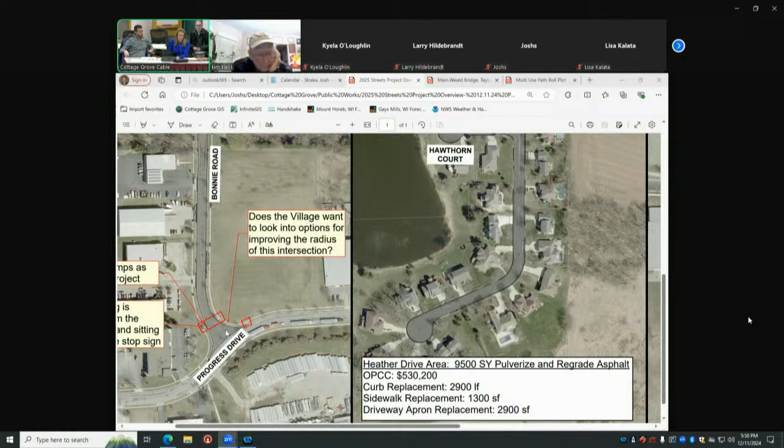Yeah, that location, with the police station there, you may have some other things you're going to be doing at that site. When we look at this intersection, it has really big radiuses, bigger than even the turning radiuses on Main Street to get onto Progress Drive. There probably isn't a need for that. It almost looks like it was planned so that trucks could turn, multiple trucks turning at once, which is a little atypical. Unless you're going to have extreme truck traffic, you just allow them to wait, hold up, and then take all lanes to make their movements.

Doing that pushes that crosswalk way back, right? And legally, the crosswalk's supposed to be in front of the stop sign. So it's just set up really strange. As we were looking at this and talking to Kyela, it almost feels like maybe we should stop short and you guys should consider this intersection a little more as the police department comes in and does their site design, or we could do something now if so decided. But we'd like to get your guys' opinion on that moving forward.

Well, my opinion is that, given there's going to be more development in this area and it's less of an industrial park with semi-truck movements like when it was originally designed in the early 90s, not knowing what facilities were going to be here, we could certainly put a road diet on this intersection and pull both those radiuses in. Now would be the time to do it as part of this project, since that's the exact same work going on. I think we have enough time to go through that exercise to do it correctly before the project goes out to bid.

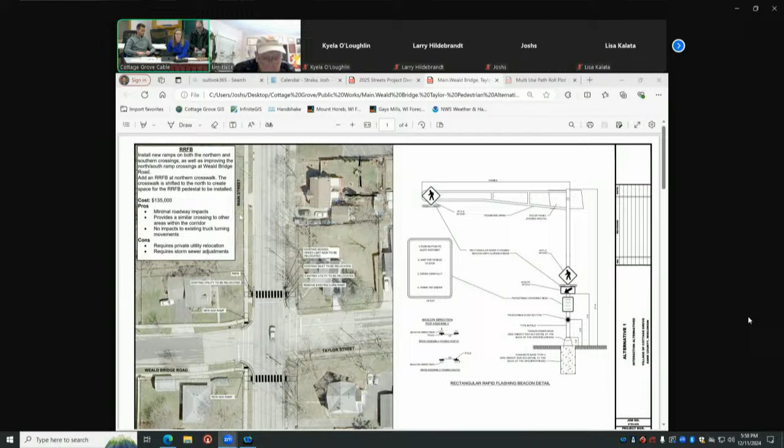The pros of this are minimal roadway impacts and it provides a similar crossing to a lot of other crossings in the corridor. When this crossing gets shifted to the north, there are some minor utility impacts. Along with this project, the other crossings here are upgraded or updated to current ADA, and then another crossing is included on the south side.

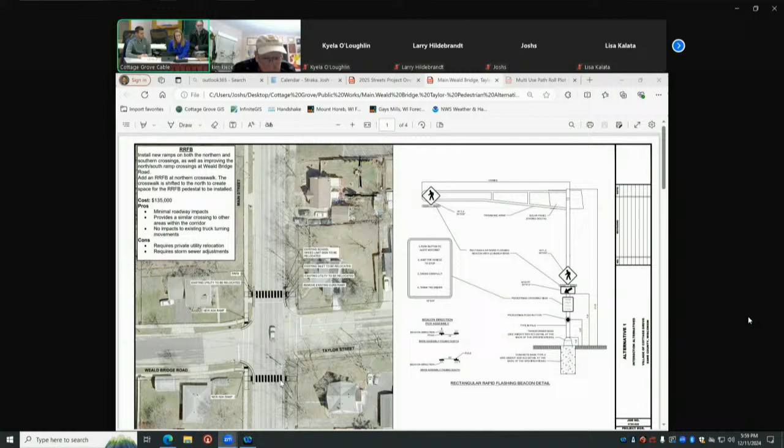Some of the cons are it requires some private utility relocates and storm sewer adjustments. Technically, with the mountable median, it does not provide pedestrian refuge here. And then when the lanes are narrowed, the tapers would remove some of the parking along Main Street, which was discussed as an important part of this.

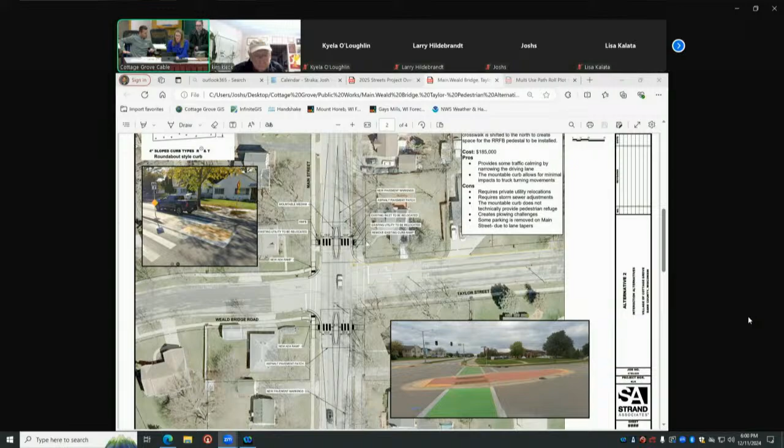Alternative 3 would be a raised crosswalk. Similar to the previous alternatives, an RRFB would go in, shifted a little bit to the north to provide space for that. The raised crosswalk wouldn't really impact turning movements, and along with the other alternatives, the other crossings would be improved and another crossing would be added to the south.

You can see a picture here from Monona that would be something similar, where it would provide kind of a speed hump that would calm traffic and slow people down as well. Now this could create some plowing challenges, similar to the median as well.

The last option would be to provide bump outs. These bump outs would shorten the crossing for pedestrians. They wouldn't have to be shifted anywhere because this would create space for the RRFB. This would impact turning movements drastically in this area, which was discussed as an issue.

So we would just be looking for any direction on which alternative you think we want to pursue. Do you want to go? There's first. I'll add something because there's been conversation about it here tonight too from the public. This is kind of, there's like two things going on at once, right?

We're looking at this intersection for kind of pedestrian and bike movements. But then there's also this side issue of Lakewood going on about what additional traffic is going to be generated that comes to this intersection. We recently met with Lakewood. We know they have a traffic engineer on hand. They're doing counts out here, peak hour counts both in the morning and afternoon, and then they'll project what's coming out of their development to this intersection in a traffic impact analysis.

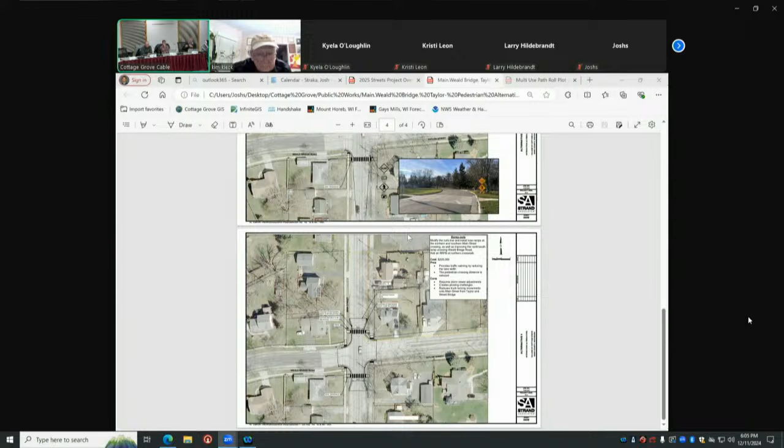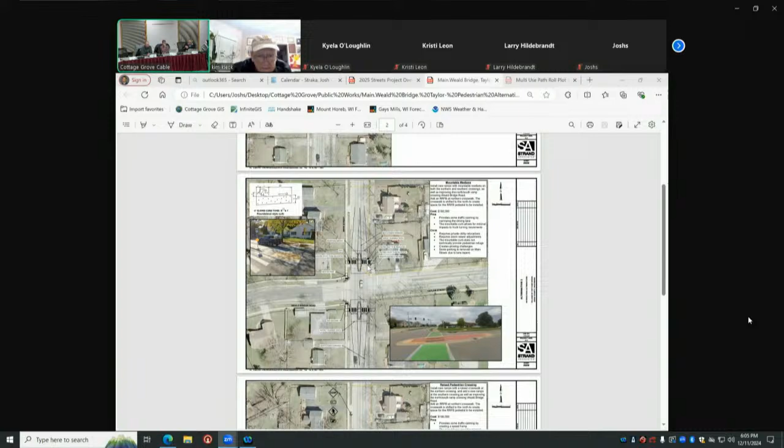The one alternative, I think it's number two, or even two or three, with the—I'll call it a speed bump, but the island, the hump, whatever you want to call it—my only concern would be, you have such large traffic going through there, big trucks. Does that create a lot of noise? Is there a lot of boom, boom, boom? Because wouldn't want the people living next to it to have to listen to that all the time.

Yes, it can. As part of the project, when I was discussing with Strand, it was what are the 4 best options we could bring to you guys, knowing the different constraints. That's why they put together that pro-con list with all the options, because it ultimately depends on whether we're looking to improve the intersection, which would be option 1, without creating smaller turn lanes, truck turning movements, or adding a mountable curb.

One thing I think would be important to note is I don't think there would be too much added noise, as long as you're going the appropriate speed.

But I think the most prudent option is probably to start with option 1, see where we're at going forward. If we need to slow people down continually, we can look at a speed hump. But based on what people have said about the large vehicles, I think having a median is probably not the greatest idea, and bringing in those curbs maybe not such a good idea either.

One question I did have is this looks like zebra stripes in the rendering. Most of the crosswalks in the village are just the transverse lines. Do we have a village guideline for what kind of paint we use when doing crosswalks?

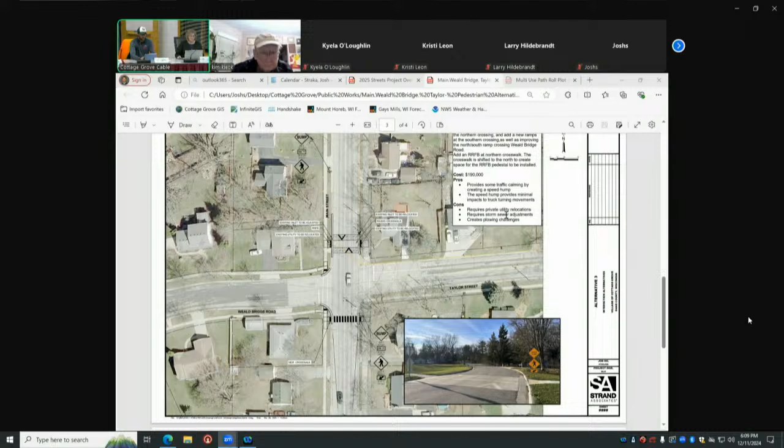All right, we will move to 5F, discuss the multi-use path. Sure, yeah, so the last project is the one along Cottage Grove Road.

Let me zoom out here for a second. Kristi, I'll let you take over a little bit on some of the discussion on this.

So it's creating that widened path to finish off the path that runs along Cottage Grove Road from Southern Grange over to Main Street. Starting at the west side, we just connect in, and we've chosen this kind of meandering path to follow the current multi-use path cross-section requirements.

Unfortunately, there are trees that are removed. We tried to move things around and save what we could while also meeting that cross-section requirement. There's some areas where we would tie into existing concrete. We come forward towards the road here because of this ditch area, and go through all of these driveways over here.

Can't see the side. The main portion to discuss here would be this wall requirement. There's many trees over here and an existing wall, and we've pushed the path as close to the road as we could and tried to do our best to save these trees in this area.

The path would get widened here, to not have a 2-foot strip of grass to maintain in this area. I'll zoom in on a cross-section in a second. That's where all those oak trees are, if you remember. We've talked about it in the past, right?

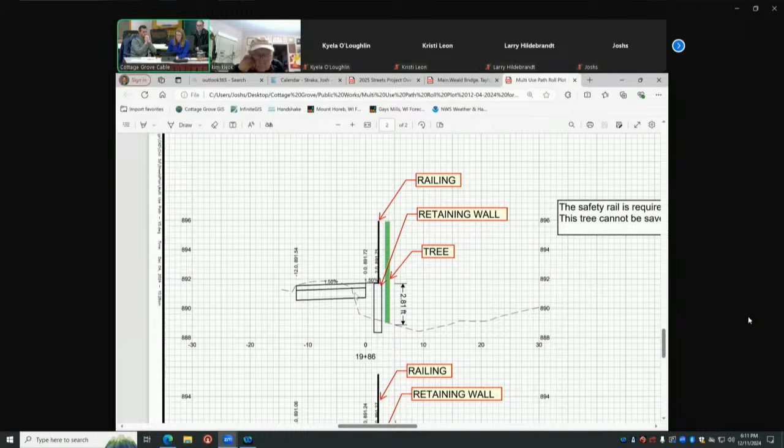So the way this would look at this point would be about a 3-foot wall here, and where the tree is surveyed would be right up next to that wall. So it just doesn't seem likely that it would get saved. And due to the wall and the distance off the path, there would be a railing requirement for that retaining wall.

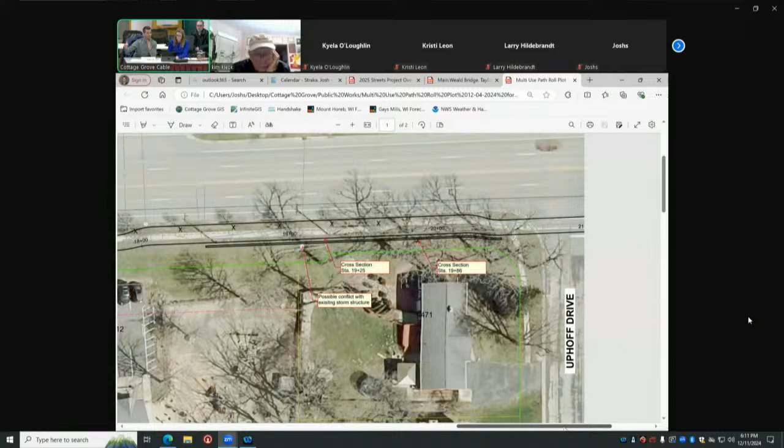Right, so we're showing that right along the curb, the path at the curb at that point. It goes back, but you're providing 2 feet of clear, so you're not riding right up against the fence either, to provide a little bit of clear space there as well.

So we're trying to hit some of the standards as part of that and try not to over narrow it. We could do a variance there and over narrow it, but then I feel like people are going to be upset that it might be a little too narrow in that section. It's up to you guys - it's either one tree or narrowing it completely there.

How wide do we have back of curb to back of wall right now as it's shown? It's a 12-foot path and then 2 feet to the front of wall, so 14 feet - 14 feet from back of curb to the street side of the wall. Typically you provide 2 feet of clear on either side.

So, Mike, think of that - that would be a 10-foot path. You could get a 10-foot path with 2 feet of grass on the terrace and 2 feet of grass against the wall. Yeah, but we'd probably just pave up against the curb, so you're not trying to pave that 2 feet of grass there. But even at a 10-foot wide path, which is 6 feet wider than the sidewalk that's there...

We could go to a 4-foot terrace, which would be very comfortable to maintain and look good, and keep people away from that lane of traffic on Cottage Grove Road, and still have 10 feet wide of pavement that a bicycle, walkers, runners, etc. could easily stay a foot off that railing comfortably and have plenty of passing room. My opinion would be to stay with 10 feet of pavement and 4 feet of terrace to keep people closer, further away from traffic, closer to the railing.

I mean, it's a railing. It's not like we're going 10 miles an hour on a bike through there. I think that's safe and comfortable and still provides a better look.

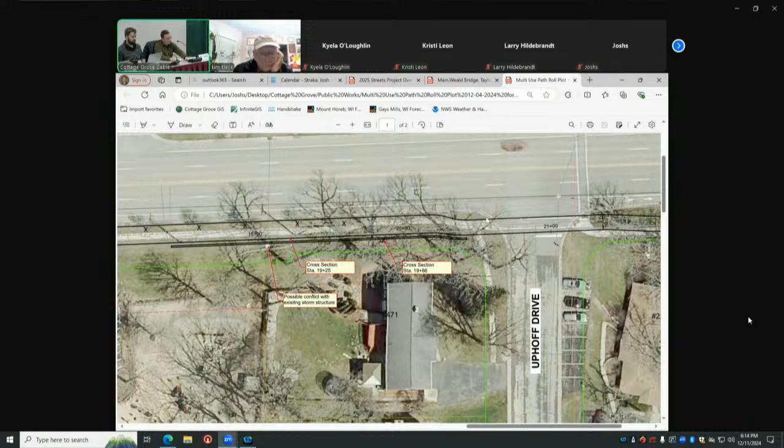The traffic is just too fast right there. Yeah, it pulls them away from it. Even the sidewalk is too close right now. And it would probably put it close to where the sidewalk is now, but you'd have a wider path that you could stay further away, which is kind of what you're going for.

There's an overhead distribution line along the south side of the sidewalk today. Does this accommodate that, or does that have to get relocated? I'm working with Alliant as part of the project, and it will be buried underground.

So that's the other thing to consider, this path is taking out trees along there. A lot of the trees now planted along there are the lower growing variety because they don't want them growing into the lines. So it might not be bad that there's some replanting opportunity here to create a corridor with some higher trees even on that side. While we don't want to take out trees, it might give you a chance to plant some stuff back that makes the corridor feel a bit more like an older corridor with higher trees on either side too. Just maybe a positive.

Are you going to describe further down the line, or should I hold my questions about further down the line? Sorry, Kristi, we kind of jumped in there.

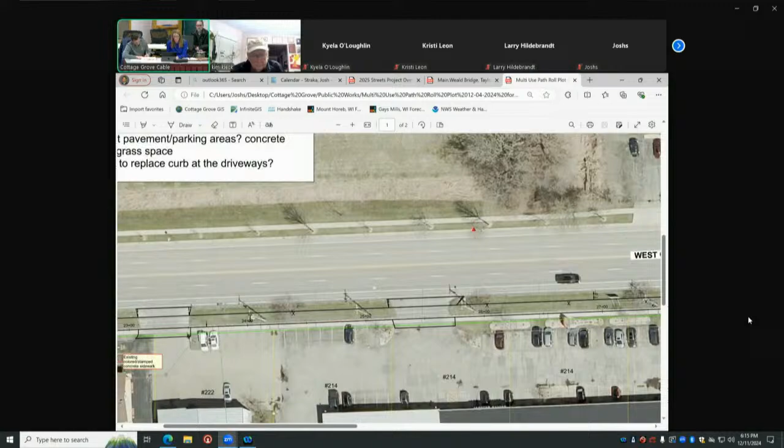So the rest of the next portion here, continuing to the east, is a lot simpler, less in the way. There are some trees, we go through the driveways, and we move closer to the road here due to some right-of-way changes.

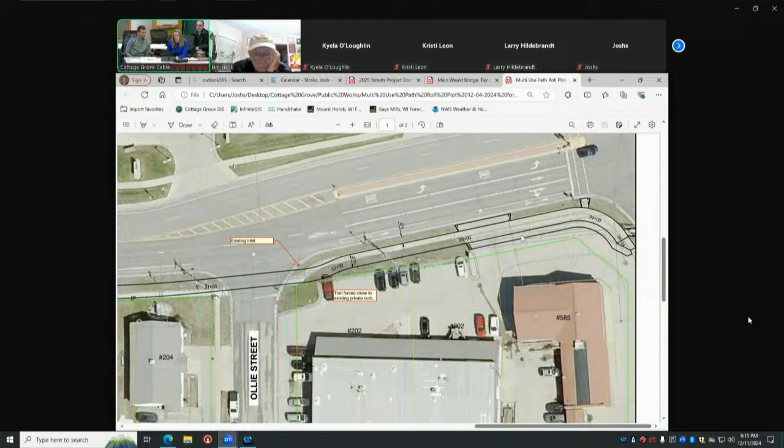We cross the street, and this area over by Ollie Street is one of our questions. Right now we have an asphalt path proposed. We're not sure if you'd like concrete through the driveways, or in this area possibly put concrete in to delineate it more where the asphalt goes right up against the sidewalk.

And then we have some questions. Do you want concrete through the driveways? Do you want to replace trees as part of the project? Are you okay with some of the grading limits going beyond the right-of-way to tie into some of these driveways better? And would you want to replace any of the curb at the driveways, or would we want to try to keep that within the limits of the existing curb? Or what were your questions?

Well, I'll speak to a little bit of that. I'm kind of split on the bike path going through the driveways. I feel that heavier truck traffic can do more damage to the asphalt through those driveways and shorten its life. I'd prefer to see concrete. I know you've got a lip or a bump each time you cross a driveway with the bike path at that location.

So I'll defer to your expertise as to which one makes the most sense. My preference would be the concrete, I guess.

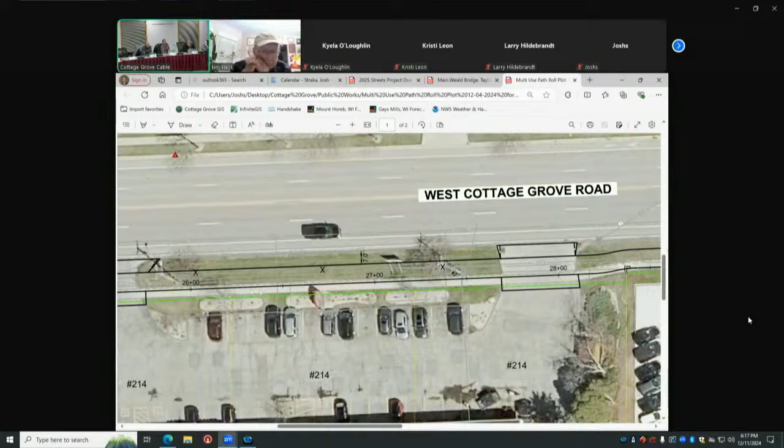Next question is, in front of Meineke and the shopping center there, right now the biggest problem is cars parking right up onto or over the sidewalk when you're trying to run or walk through there in the evenings. What do we have for separation to keep that from happening when this becomes an asphalt path tight to the parking lot? Is there a landscape separation there, or is it asphalt to asphalt a little further west of that location?

That's fine in front of the shopping center, it's right down there closer to Meineke and the west side. Yeah, that area right there. So we do have space proposed, 4 feet from the edge of the concrete to the asphalt the way it is. Okay, that would be very helpful, because that's the biggest problem right now, a 4-foot sidewalk with a car generally overhanging at least a foot, if not 2, onto the sidewalk. Makes it very difficult to get through there a lot of the time.

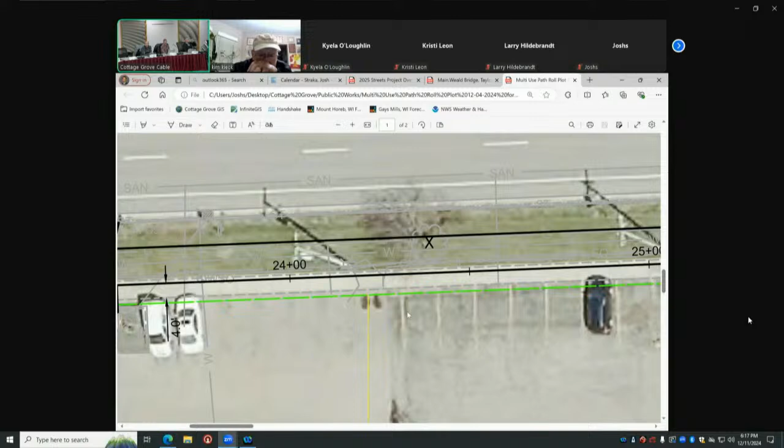In the winter, they plow all the snow right there, and it often goes right under the sidewalk. Yeah, I mean it requires a few more trees to come out again along that piece, but it gives you that separation like you were talking about, Mike. That's why we proposed it set away a little bit from that parking.

Yeah, last comment regarding the trees. Knowing that the overhead line is going away, I absolutely would like to see a line item for replacing new terrace trees throughout this area. Once again, that's another thing we can consider to accept or not accept come bid time or budget time. But I do believe we should be trying to plant trees back in there as part of this.

So I want to make a comment that I have general concerns about safety of the bikers on this path, all the driveways, especially Meineke and Black Bear. I would like to have some discussion of what we can do to help mitigate this. I think the idea of concrete over these driveways, I would not be in favor of. Part of it is this perception of right-of-way, and I want these bikers to have the right-of-way and know that the vehicles need to watch for them and wait for them. I know there's construction reasons why you wouldn't choose that, but in general, these are very uncontrolled intersections that are of high traffic, and bikers are going much faster than walkers. There is a much higher chance of some problems occurring. I don't know the best solution. I don't know if it's coloring them a different color, if it's signs, or if it's considering the north side. And I know the north side has its own problems with ACE, and then the cross section or the intersection with Oak and everything. But I'm concerned, and I don't know the best solution forward.

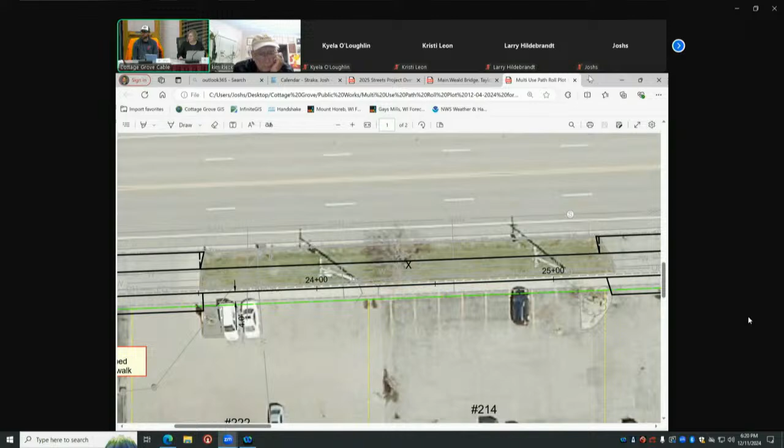Has anybody seen the new stuff they did in Fitchburg along Fish Hatch? It is green paint, and it's not all green. It's green on the outside, like a green stripe over the striping. So it's green striped on the outside of the path, through, it's by Cahill Main, so if you've ever been to the Great Dane in that area, there's a left, right out, right in, right out. And so what they've done to make it more pedestrian safety is, through a street, an intersection, a driveway essentially, they have greened it on both outside of it to make it more visible for residents, for drivers. So my only question would be, in the idea of long-term maintenance, can it be green epoxy that we can maintain instead of high-friction surface coating that we can't do ourselves to maintain, and that's going to cost 10 times as much up front? That would have to be something we would have to look into, because we don't keep green paint on stock right now.

Right, so that is what it looks like up and down the new Fish Hatch corridor. They do use concrete in theirs, and I think it's probably from what Mike said. I've seen it both ways in a lot of different places, but they use this same kind of zebra striping that we were talking about on the pavement, but it's green, because green indicates the biking side of it. I've seen these completely painted in green, I've seen them asphalt and concrete. It's kind of all over the board. Every community kind of has their thing. Right now, almost all yours are asphalt as they cross. I think all your crossings are asphalt today on the path. But I get how some of these, you just want to make people aware as they're crossing it. Hey, you're crossing a path, you're crossing a path for the drivers. And I haven't heard anything bad about these ones in Fitchburg at all. They seem to be working, and they haven't had any issues with them so far. But maintenance is a big deal. Like Mike said, you got to keep up the paint.